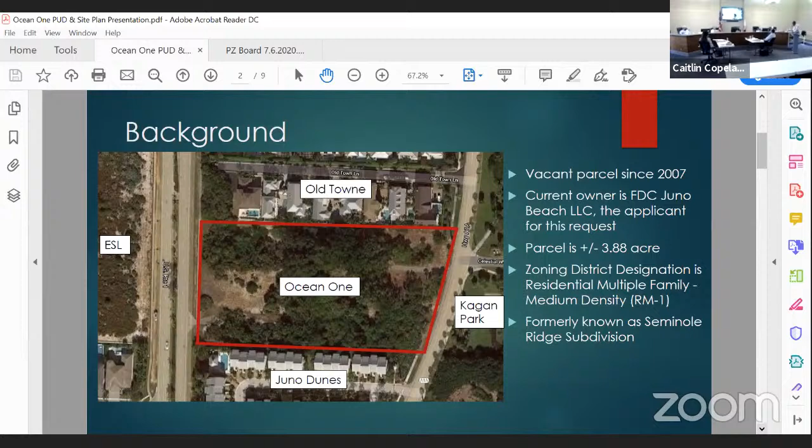Now I want to talk about the request for PUD and site plan review. The DRC reviewed this project on 3 different occasions and moved the project forward subject to the technical comments made by the DRC. Based upon the DRC's recommendations, staff determined that the applicant met all of the technical requirements to move this project forward.

Section 34-116 states that no construction may begin prior to review and approval from the DRC, the Planning and Zoning Board, and the town council. The purpose of a PUD is to provide for a special exception to develop projects with provisions and standards that ensure compatibility among land uses, foster innovation in site planning and development, and encourage sound design practices.

Now I want to draw your attention to the architecture of the buildings. The architecture shall be representative of the mid-20th century modern style. Such features include large glass panels, as you see here and here, that allow for outdoor light to enter via the rear and front of the buildings.

The balconies will consist of a glass panel with white railing, and each garage door will consist of a white frame and frosted glass. The second and third floor shall consist of glass railings and white handrails. The driveway and walkways will be paved with block, in a light gray texture.

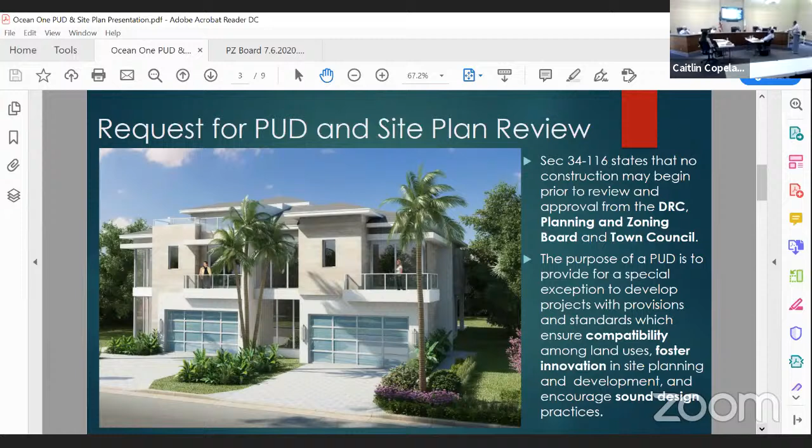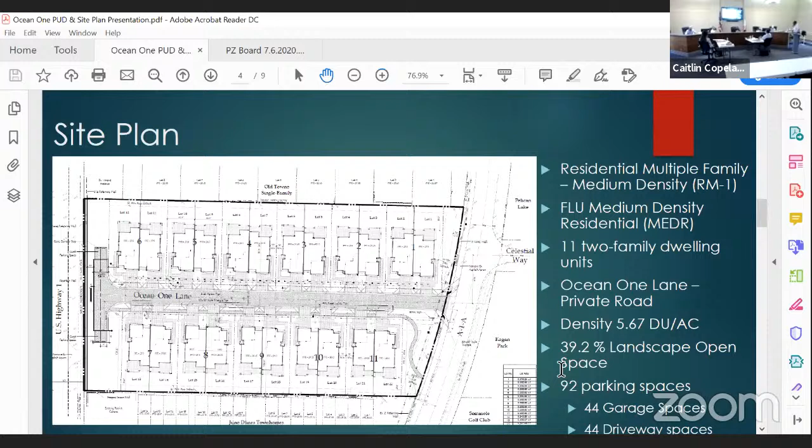Continuing on with the site plan, Ocean One Lane, which is a private street, will be subject to access by the residents of the community. This is in the RM zoning district with a future land use designation of medium density residential consisting of 11 two-family dwelling units. Ocean One Lane will be a private road subject to use by the residents and their visitors. It is not a through road. It will end here, and access to US Highway 1 will not exist.

Regarding density, the RM1 allows for 8 dwelling units per acre, and according to PUD, it allows 10 dwelling units per acre. In this instance, the project is proposing 5.67 dwelling units per acre.

Regarding open space landscaping, there will be 39.2% of landscape open space on this site. The zoning code allows for 20% total landscape open space, and according to PUD standards, it allows for 15%. As you can see, the applicant more than meets that requirement.

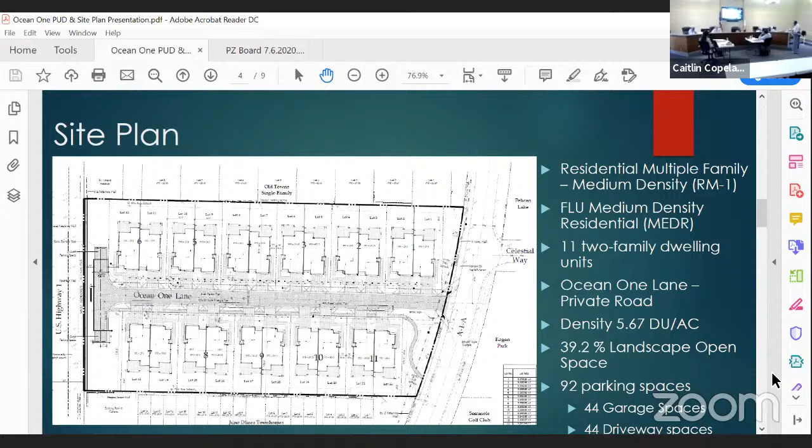Next is the parking requirement, which is that the code requires two parking spaces per dwelling unit. The applicant is proposing 92 parking spaces, 44 of which will be existing within the enclosed garage, and 44 additional spaces accessed through the driveway, with 4 guest spaces located at the far west end of the property, 2 spaces to the north and 2 spaces to the south, for a total of 92 spaces.

Excuse me, can you go over the visitor parking again? I'm sorry, can you take off here? I apologize, you were going over the east side and west side visitor parking. Yes, sir, can you go over that one more time? I'll go over it again.

There are 92 total parking spaces, 44 of which will be garage spaces inside the garage, and another 44 spaces in the driveway. So there's essentially room for two cars in the garage, two cars in the driveway. Then there will be 4 additional guest spaces, which will be to the far west side of the property, 2 spaces to the north and 2 guest spaces to the south.

Kurt, what is the requirement? Excuse me, how many spaces are required? The number of parking spaces required is 2 parking spaces per dwelling unit. Is that clear for you, Mr. Hamilton? Thank you, okay good.

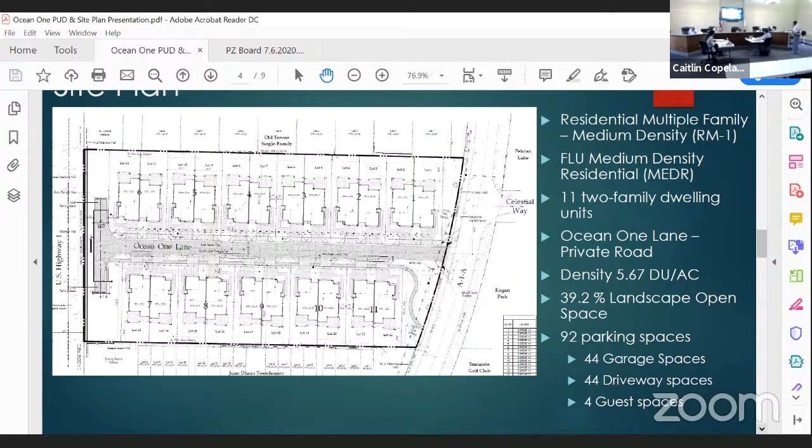Now moving on, the intent of the review for the wall is to make sure there's structural integrity for those retaining walls. The next thing is that the code requires a 10-foot minimum setback for the two-family units. If I may show you this, there's a 10-foot minimum along the rear property line, which is required by the code. But the applicant is going to provide a 40-foot setback from the rear wall of the building to the rear property line for one unit, and for the other unit it would be approximately 38 feet from the rear wall to the rear property line. The code requires 10, and they're going to provide 38 and 40-foot rear setbacks.

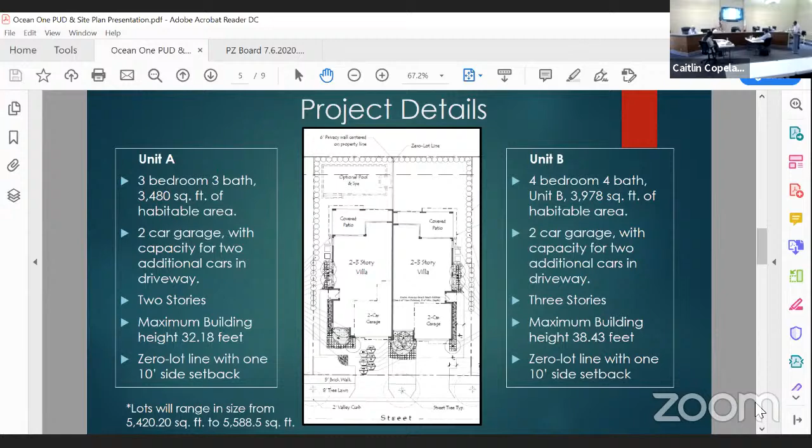Is that the same for the homes on the north and the homes on the south? That is correct, yes sir. Yes, Mr. Shea.

Now, units A and B. Unit A is proposing a 3-bedroom, 3-bath project with 3,480 square feet of habitable area. Unit B will be a 4-bedroom, 4-bath with 3,978 square feet of habitable area. As I said earlier, this will be a 2-car garage with 2 additional spaces in the driveway of each. Unit A will have 2 stories, and Unit B will be a 3-story structure.

I'll get further into that in a minute. Building height for Unit A will be just over 32 feet, and the building height for Unit B will be 38.43, just under 38.5 feet.

There will be a 0 lot line on one side of the buildings, and then on the non-zero side here and here, there will be a minimum of a 10-foot side setback. I'm sorry, I meant 10 feet, not 10 yards. I was thinking in football terms, sorry.

10-foot setback. The lots will range in size from 5,420 to 5,588 square feet per unit. The code, the RM1, talks about a minimum lot size of 10,000 square feet with a 75-foot wide lot width. This entire lot averages about 85 feet in width, with a total lot area averaging about 10,855 square feet. So as you can see, this project will meet those requirements.

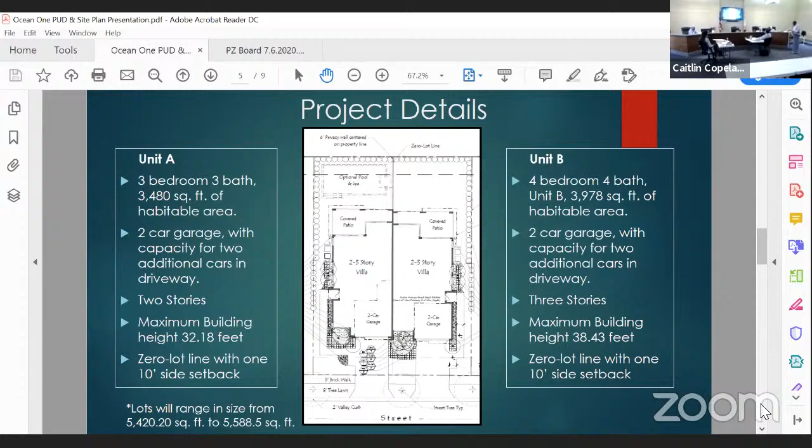Now, the 3rd floor option. Let's talk about this a little bit. There will be no windows exposed for these. First of all, there are two third floor options, okay? There will be no windows exposed looking out to the rear of the property toward the Old Towne community or the Juno Dunes community. So I want to make sure that's really clear. There will be no windows at this end of the property here on the third floor, okay?

All the windows will be directed out toward the opposite end where the decks are. So let's talk about those two options. As you can see here by the schematic, the third floor option 1 offers a living space of 552 square feet with an open deck of 593 square feet, which is here to my left and should be to your left as well, and to the left of the audience. The second third floor option is a living space of 941 square feet with an open deck of 222 square feet, which is this option here, and the deck, the 222, is this area here. It's not shaded, but as you can see, it's a much smaller area. The living area is increased by over 390 some square feet.

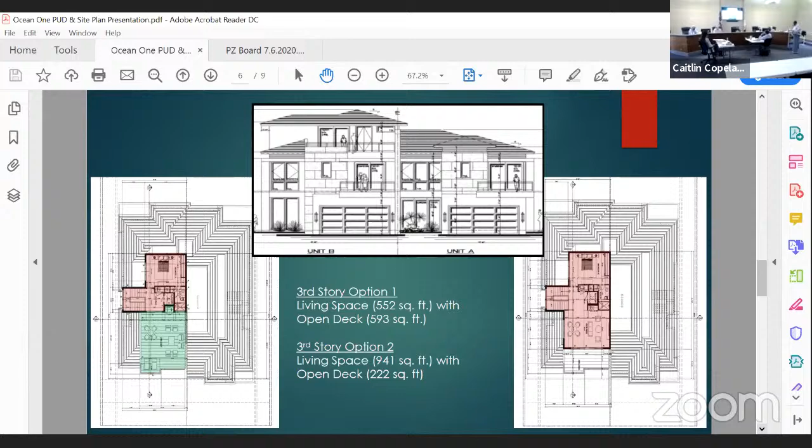Okay. Now, again, to repeat, no windows here or over here affecting the residential communities. The PUD process.

The zoning code mentions a maximum lot coverage of 35%. The PUD process allows for a 25% modification. In this instance, the applicant is proposing 43.75% lot coverage. So that 8.75% increase is exactly a 25% increase.

The building height. This is also an important point I want to emphasize. The code talks about here, when you look at PUD flexibility, that the maximum height may be increased by 1 story provided the additional floor is occupied by dwelling units. And as you can remember here, that extra third floor is being occupied by dwelling units. Therefore, they can go the additional story, which in most building codes, a story is about 10 feet inside from floor to ceiling.

Now, in looking at the very first paragraph here, after determining that the requirements of the PUD division have been met, the board shall recommend approval with modification, or disapproval. The board may recommend the establishment of a planned unit development, provided it determines that all 8 PUD standards have been met, as noted on page 3 of the memorandum. There are 8 standards there, and staff's review and analysis has determined that we didn't see any objections or any of those 8 standards where the applicant did not meet them. They appear to have met them.

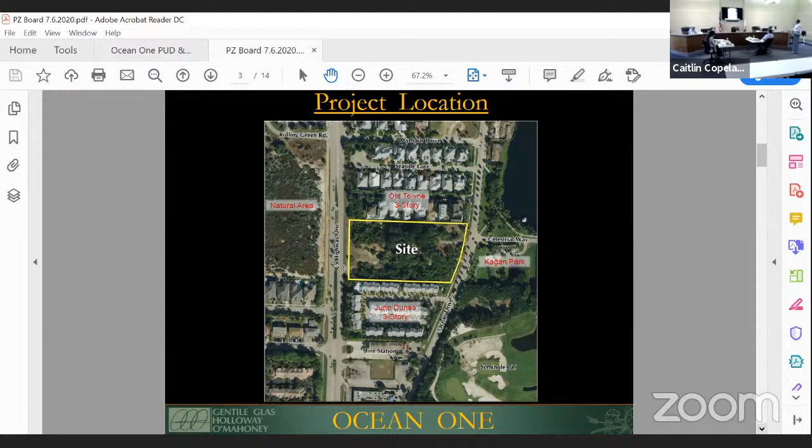Just a brief site history. The subject property is part of the old Seminole Ridge plat. It did once have a single-family home on this property that was removed back in 2007. And it did have a previous approval granted on this property for 31 townhomes, which was at 8 dwelling units per acre.

This is the surrounding land use and zoning of the property. To the east, you have Kagan Park, which has a zoning and land use of public recreation. To the west, we have the environmentally sensitive lands, which have a future land use of conservation.

To the north and south are the important ones. To the north, we have Old Town, which has a zoning of RS1 residential single family and a future land use of residential low density. To the south, we have the Juno Dunes Townhomes, which has a zoning of RH residential multiple family high density and a land use of high density.

So we fall right in between those two, sandwiched between the properties, with a mid-range zoning and land use. Our zoning is RM residential multifamily medium density, with a residential medium density land use. It's a great transitional use between the two, from high to low density, from south to north, and it works well for both existing developments.

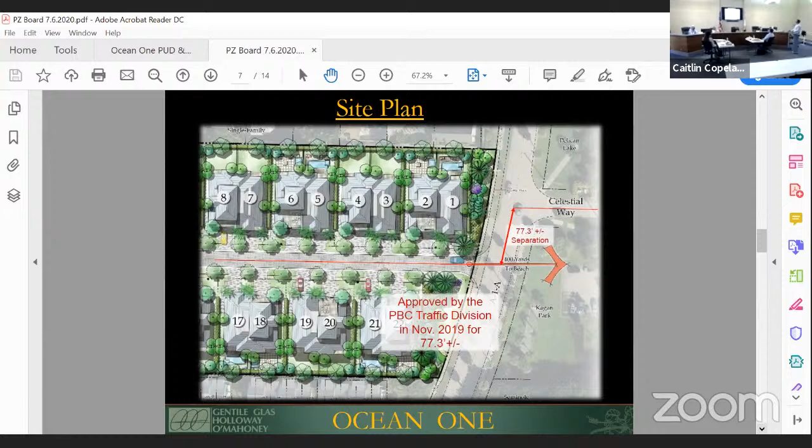The separation currently between our proposed road and Celestial Way is 77.3 feet. We've been approved by Palm Beach County Traffic Division for exactly that 77.3 feet, plus or minus, approved back in November. You have email correspondence in your package stating that, but not the exhibit—this was the exhibit sent to Palm Beach County that they approved, Exhibit E1.1, which again showed that 77.3 foot separation from the center line of our proposed road to the center line of Celestial Way.

This is a blow up, a little detail of the typical 2-family villa. Each of those lots have a minimum depth of 124.5 feet and a minimum width of 42.5 feet. We have a 10-foot setback from each of the units to their side property line.

These units are 2-story with an optional 3rd story. We have a 2-story shown on the right, and the 3rd story shown with multiple options. You can have it with deck, all deck, or partial, like this one, which is partially enclosed 3-story, with a partially enclosed 3rd-story balcony.

We also have all brick pavered driveways and sidewalks. We proposed a plank paver, which is a really nice, new style paver, with a plank looking longer, about 18 inches to 2 feet long. That gives you a nice feel.

Along the sides, we proposed a black aluminum picket fence, which would go between the units, between each of the buildings. And then the 6-foot privacy wall, which would be on the property line to the rear, and also the common zero lot line property separating the interior lots.

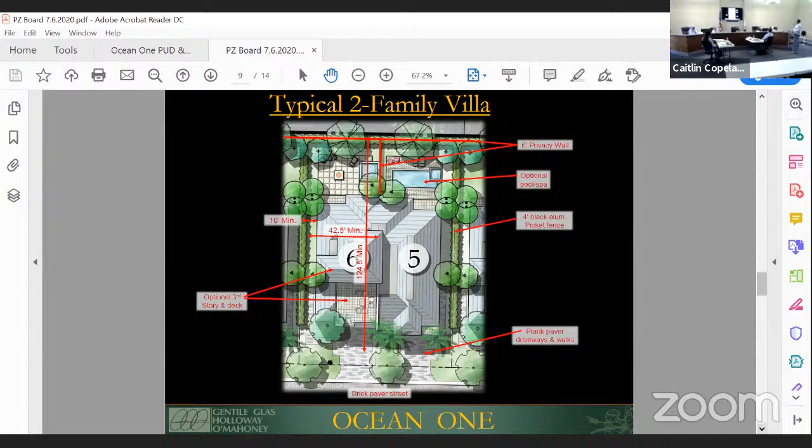Just some site data numbers. The total area is 3.88 acres. The minimum lot size, combining the 2 lots for the 1 building, is 10,855 square feet, whereas 7,500 square feet is the minimum allowable, so we greatly exceed that. The proposed density is 22 units, which is only 5.67 dwelling units per acre. The allowable density under PUD is 39 units, or 10 units per acre. Our building lot coverage for the overall site is 30.8%, but 43.75% is the maximum allowable per lot.

Our open space provided for the overall site is 47.2%. For the PUD, 15% is the minimum allowable per lot. Our maximum building height is 38.43 feet, 3 stories, not to exceed 40 feet, which is what is allowable. So we are under the maximum allowable.

Our parking required is 47 spaces, which is 2 spaces per unit. I'm pretty sure, Kurt, we also have to have 3 guest spaces per code. So it's 47 required, and we do provide 92, which is 2 in the garage, 2 in the driveway, and then we have 4 additional guest spots at the hammerhead.

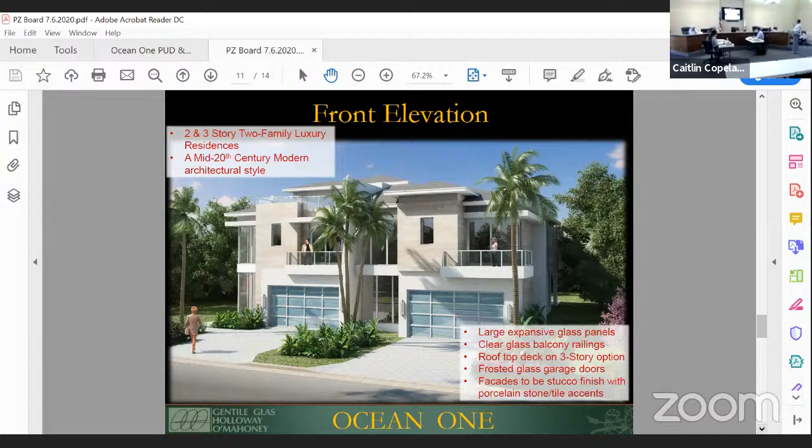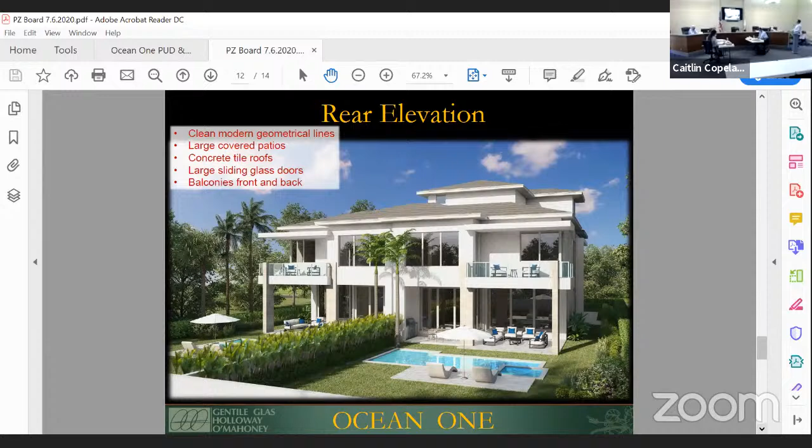So just some of the project conclusions. This is a modest infill project that adds luxury residential housing to a very strong housing market, and it will greatly enhance the overall area. It is compatible with the abutting 3-story single-family homes to the north and the 3-story townhomes to the south. It's a great transitional development for those 2 communities.

It promotes the overall benefits, focusing around smart growth ideas, the environment, and the economy. This project will add approximately 2.7% to your annual budget, or about $81,000. The site plan is consistent with the town's comprehensive plan and meets all PUD standards in the zoning code, requiring no waivers or variances. And lastly, we agree with all conditions of approval as listed in the staff report.

Thank you. Don't go away, there'll be a lot of questions.

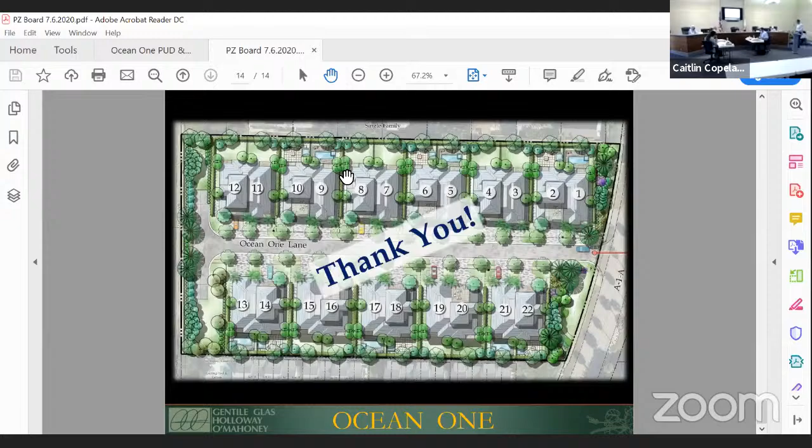You want to start at your end, or do you have any comments? I have questions?

Kurt, do you have any observations for us that we should be concerned about from your professional perspective? Excuse me, right before we go into that, we should actually do public hearing, and then we can do questions. We have people on Zoom that actually want to say something.

I was going to take them next, but normally, after the applicant presentation, we ask questions of the applicant, and I would like the public to be able to hear those questions and answers before we hear from them. It helps us with whatever the board decides.

I'm sorry, Mr. Hamilton, what was the question? No, I was saying I do have some comments, but I'd like to have either you or Kurt give some observations about the project that we should be made aware of, from your perspective. Yes, of course, I can give you my opinion and feedback on it.

When we first heard from Mr. Tommy Frankel and the representatives of GGHO, they came to the town to discuss a single-family project, which all of you are aware, we put it in the activity report. We were very happy about it because that property has been vacant for a long time, since 2007, but even before that, the structure there was not occupied. So the fact that somebody was moving forward, the staff was actually very happy about that.